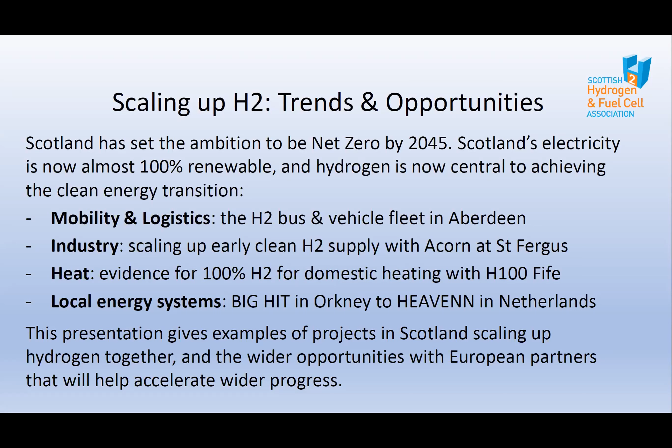And we're also linking into other projects around Europe. Many of these are taking some of the ideas from Scotland and actually scaling up. And as a key part of that, CeeD is obviously bringing together people from across Scotland with many different areas of interest. The Scottish Hydrogen Fuel Cell Association, we're targeting the activities with hydrogen fuel cells, basically what it says on the tin. So many of the speakers today are actually from the association, and if you want to find out more, please do get in touch with me at any time.

So where do we start from? Well, the key thing here is net zero, and a lot of the work that is happening now is about delivering the net zero targets. Scotland's got a target for net zero by 2045, but I would suggest the really important one now is the 2030 target, which is a 75% reduction in greenhouse gas emissions by 2030.

To put that in context, the European Union recently set their target, a 55% target by 2030. But as you'll see later on, the targets could actually be complementary.

Within Scotland, we've seen a great increase in the amount of renewable energy being produced, to the point now where Scotland's annual electricity demand is pretty much met from renewables. It was, I think, 97% of Scotland's electricity last year was met from renewable production in Scotland. But we don't stop there. We go beyond 100%, and then the opportunity is about how we start to produce green hydrogen from renewable electricity, using the electrolysis of water with electricity to produce hydrogen and oxygen. The hydrogen is what we want.

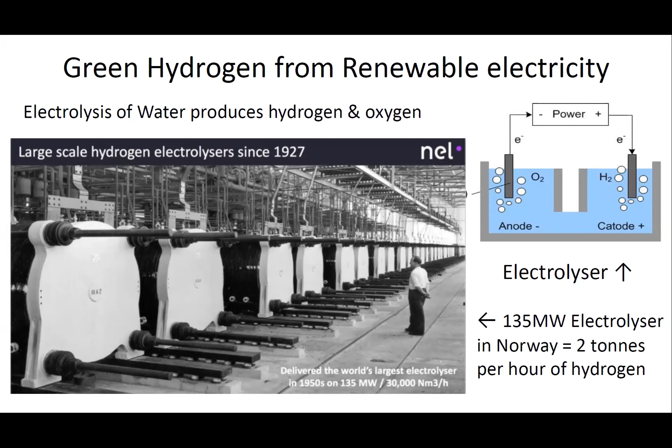Nigel, you've muted yourself. I don't know how that happened. Must have been getting too excited. Anyway, let's hope it doesn't mute itself again.

So the journey around Scotland, we're going to take in Aberdeen, Fife, Orkney, and then touch briefly on Cromarty before we look at the wider context.

Starting in Fife, 10 years ago the Hydrogen Office in Fife was opened. Since then, it's done fantastic work building up the appreciation of hydrogen as part of the energy system. The education and outreach has reached some 35,000 pupils and students in Methil and across Fife.

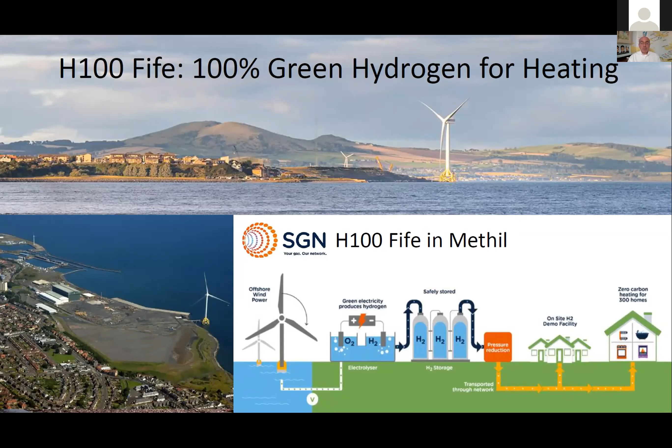The reason that's important is because the next steps in Methil are very much about how we start to deploy hydrogen in households, hydrogen for heat. Colin will probably touch on this later. It's the SGN H100 Fife project, using green hydrogen produced from offshore wind, distributing it around Methil and giving householders the option to use hydrogen instead of natural gas for domestic heating. Colin will probably pick up on this one later.

The key thing here is, why use hydrogen? Why not just use electrification? This comes back to the fact that when it's cold, we all tend to put the heating on, and that means there's a lot of demand for heat - the demand in winter for energy for heating is about 6 times more than in summer. At certain times of day it can be even more than that. On cold mornings, when everybody puts their heating on at once, there's an awesome amount of energy needed. So it's about supplying that heat securely, low carbon, all of the time.

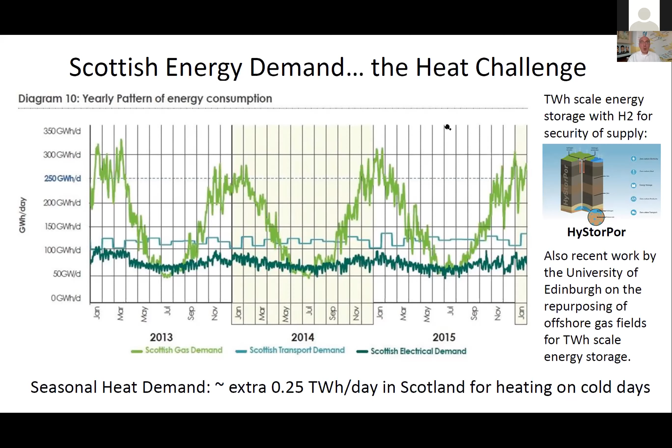Moving up to Aberdeen, the focus there has been more on transport. The deployment of hydrogen fuel cell buses in Aberdeen has allowed them to build up not just the buses, but a whole fleet of about 65 hydrogen vehicles, including buses, trucks, vans, and cars.

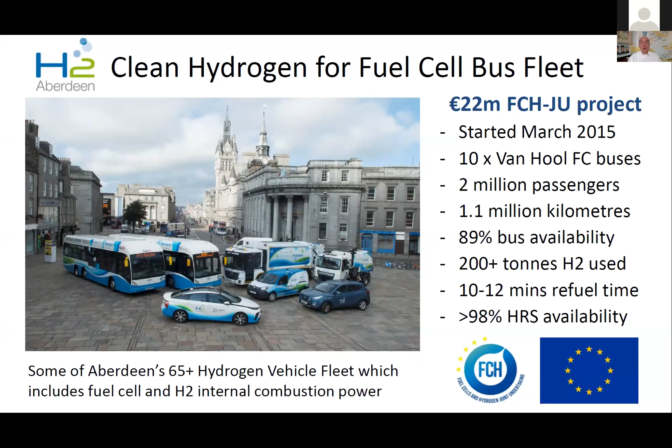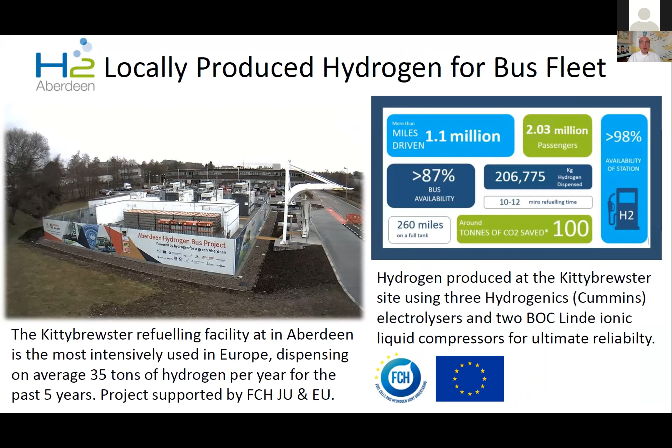This has given Aberdeen a lot of experience in not just the vehicles, but also the refueling. This refueler here we think is actually the most intensely used refueling station in Europe, dispensing about 35 tons of hydrogen per year since 2015. The buses have done 1 million miles, carried a couple of million passengers, and been exceptionally reliable. This is important - if you've only got 1 or 2 refuelers, you need to make sure they're running all of the time.

As well as the buses, there's the Mirai, the Toyota Mirai fuel cell car. Importantly, this has been put into a city car club application where anybody in Aberdeen with a driving license can use this Mirai. You just need to book it up and then take it out and experience the fuel cell comfort and low emissions.

Going forward, although fuel cells will play a massive part in delivering net zero, we also think the use of hydrogen combustion engines could be a very important approach, especially for heavy duty applications such as marine. This CMB Hydrocat is an example of one of the boats coming through at the moment - ideal for work boats, 1,000 horsepower engines running on hydrogen, using a couple of 100 kilos of hydrogen a day, but displacing a lot of fossil fuel.

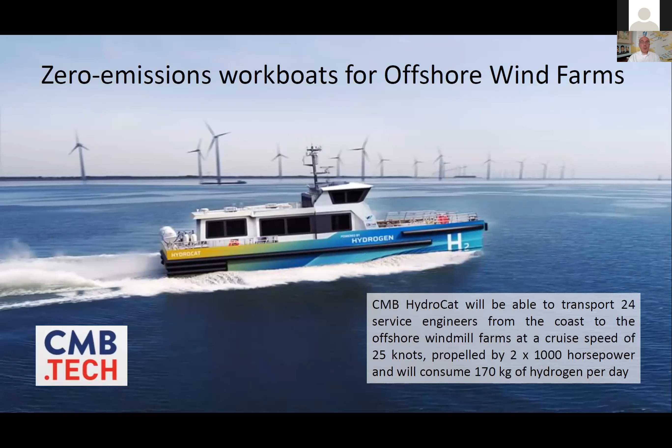Going forward, Aberdeen is very much the hub for not just offshore wind and green hydrogen, but also for the production of hydrogen from natural gas using carbon capture and storage.

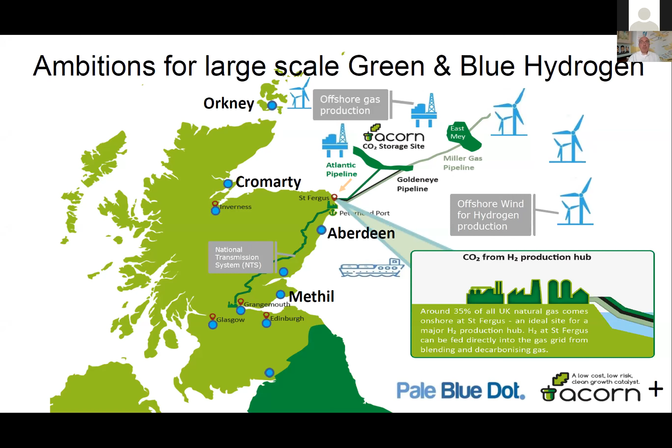The opportunity is to move green hydrogen, blue hydrogen, or low carbon energy from Scotland into Central Europe, where they need it to meet their targets. But moving now up to Orkney - this is a location that is several years ahead of the curve in terms of deployment of renewable electricity.

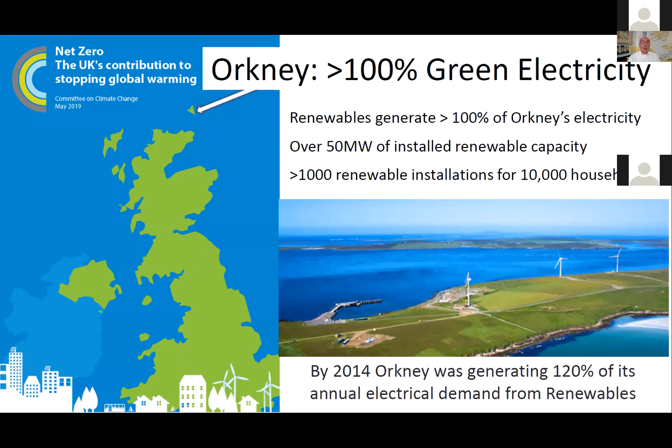They've been self-sufficient in renewable electricity for about 5 years, but that brings its own challenges. One of them is that sometimes the wind turbines produce more electricity than is needed locally. The opportunity here has been to take the hydrogen from where it's being produced on some of the islands.

So Eday and Shapinsay, and move it down to the mainland of Orkney. This is being moved by ferry.

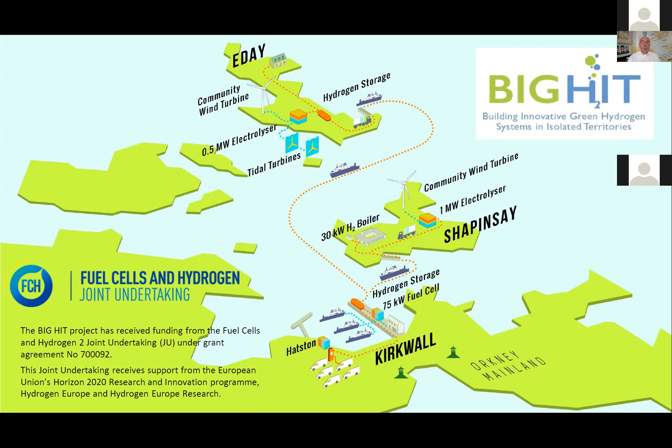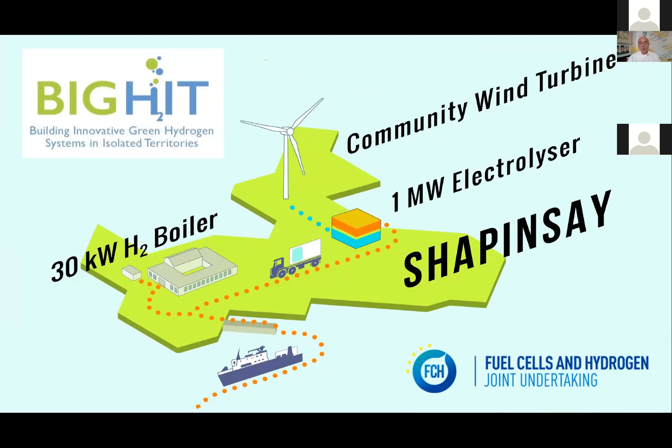Electricity from the wind turbine is used to produce the hydrogen. That can then be used on the island or moved down to Kirkwall, where it's being used for various applications - transport, heat and power. Moving forward, they've got some very interesting approaches in terms of other transport applications.

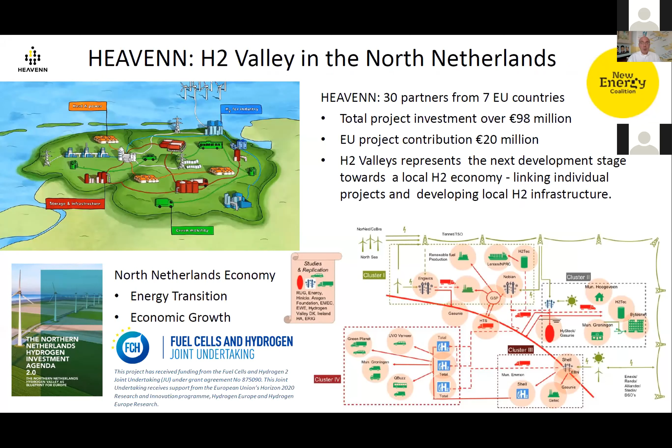But the lessons from Orkney have been applied to other countries. The North Netherlands HEAVENN project is a much larger project, but uses the same principles of building up hydrogen supply and hydrogen demand with the infrastructure.

Also on the island of Mallorca, the Green Hysland project is producing electricity from solar rather than wind, as you might expect, and is looking at using a pipeline to move the green hydrogen from where it's produced down to the city of Palma, where it will be used for heat and transport applications.

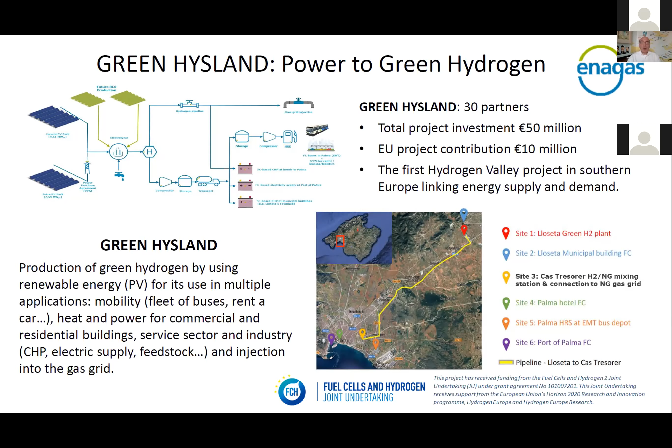So it's very much about building up the supply and demand. Further information about the approach is available through the Hydrogen Territories platform. If you're interested, just log onto the website and you can get more information from the HTP.

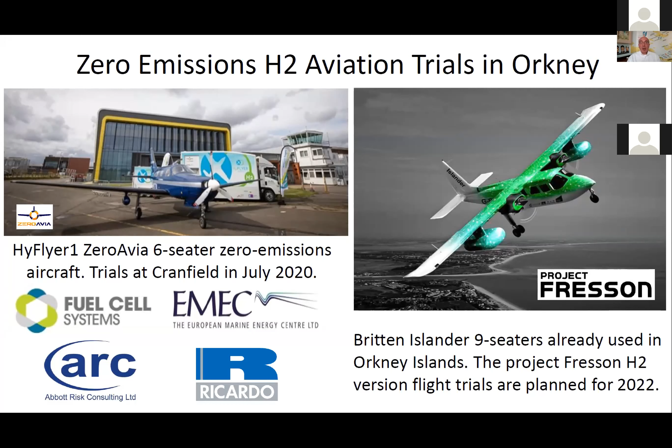So what next? Well, it's very much about some of the innovative projects. I mentioned Orkney's interest in other forms of transport. They've been involved in the HyFlyer project, the single engine hydrogen fuel cell plane that you see on the left, and the Project Fresson, which is actually converting a Britten-Norman Islander into a hydrogen plane. Those planes are actually used in Orkney.

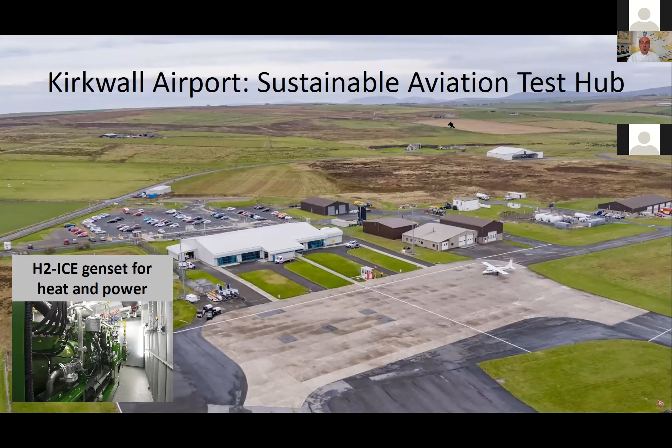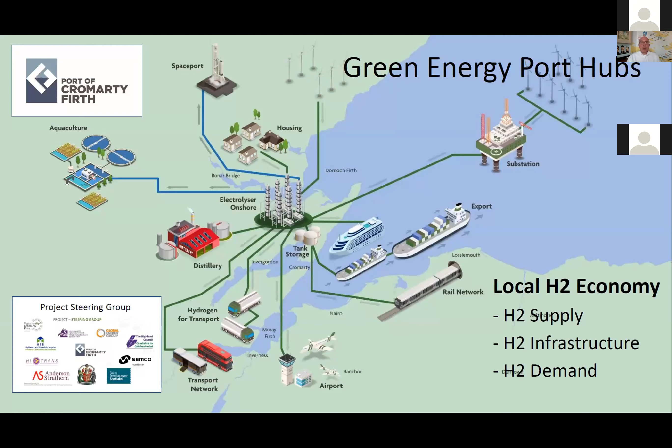And scaling up, this is where Cromarty gets very interesting as an opportunity. You'll be hearing more about this later. Just to say that the whole idea of the hub is building up supply, the infrastructure, and the demand - take any one of those away, and it gets very difficult to make it work properly.

And the opportunity for Scotland goes beyond Orkney, it goes beyond Cromarty. The North Sea has got a fantastic resource for offshore wind - it's estimated that in the Scottish part of the North Sea, there's something like 735 gigawatts of offshore wind potential. We've just started - it's a long journey, but it's going to be a massive transformation, essentially displacing the production of oil and gas from the North Sea with production of renewable energy.

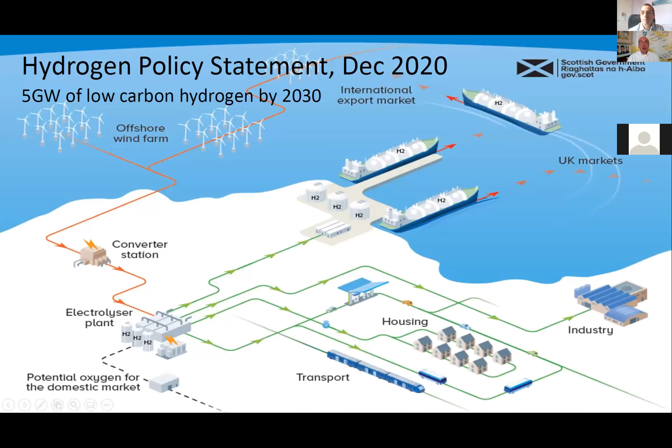And this has been recognised by the Scottish Government. The hydrogen policy statement came out in December last year with a target of 5 gigawatts of low carbon hydrogen by 2030, scaling up further for 2045. But it's not just about local demand, it also sees the potential for international export markets and also providing other areas around the UK with low carbon hydrogen.

And this comes back to essentially the opportunity. Scotland is in a fantastic place with renewables. It can build on the projects that have happened already, scale up the production of green hydrogen and blue hydrogen, and then start to supply low carbon hydrogen, low carbon energy into markets such as Central Europe, which have an ongoing need for that supply and don't have the same access to renewables.

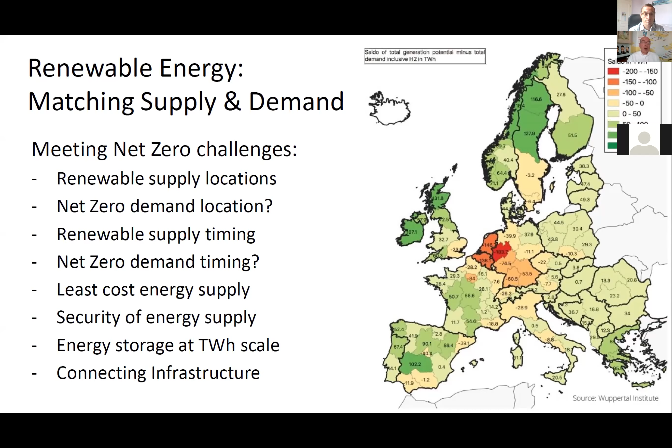Going forward, a great opportunity coming up later this year in Glasgow is COP26 in November. Hope you can make it along to that. I'm sure it will be busy. It's now been confirmed that it will be an actual in-person event. And that very much is the opportunity for Scotland: scaling up hydrogen, scaling up the use of renewables, and using it to decarbonise Scotland, and helping to decarbonise other countries and the whole of Europe.

Dave, that's very much my presentation, and I'm going to stop sharing now and hand back to yourself for the rest of the event. Thank you very much, Nigel.

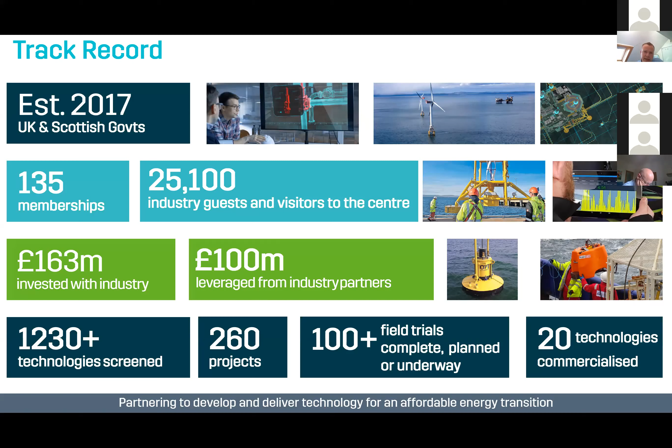In terms of our strategy, we've got 3 focus areas. We want to decarbonise the existing oil and gas industry, but we also want to look at the growth industries of hydrogen, carbon capture and storage, and offshore renewables. And then we've got a third programme looking at offshore energy 4.0 — that's digital technology, anything that can automate processes, software, all the smart stuff.

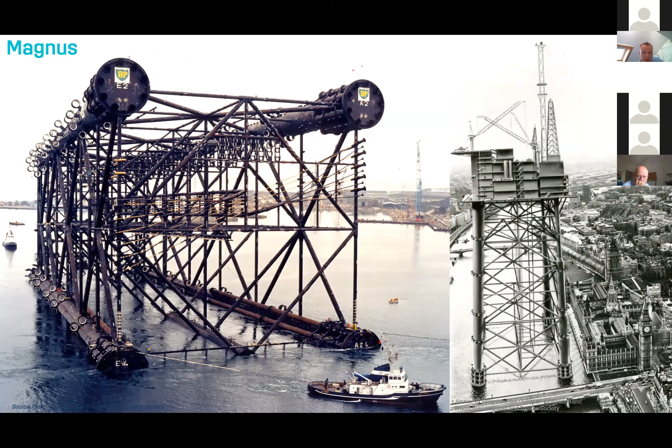Given the audience, I thought I'd start with this slide here: Magnus in the early 80s being towed out, still the largest steel jacket to be deployed in the UK North Sea — this one slightly larger than the Norwegian sector one, but a tremendous feat of engineering achievement. To me, it's a real reminder of what we can achieve as a country, both in terms of design and manufacturing capability. The image on the right always blows my mind whenever I see it, of Magnus alongside Big Ben. I've been on Magnus a few times, and you don't really get the scale of what's under the water from sitting up there on the top sides, but it's a truly colossal structure.

We look at the workforce that we had in the Cromarty Firth back in the boom days of the 70s and 80s. It probably averaged around 2,000 people at Nigg alone. You had a large workforce at Ardersier, you had the Kishorn workforce, and you had the BIFAB, or Firth of Forth, workforce.

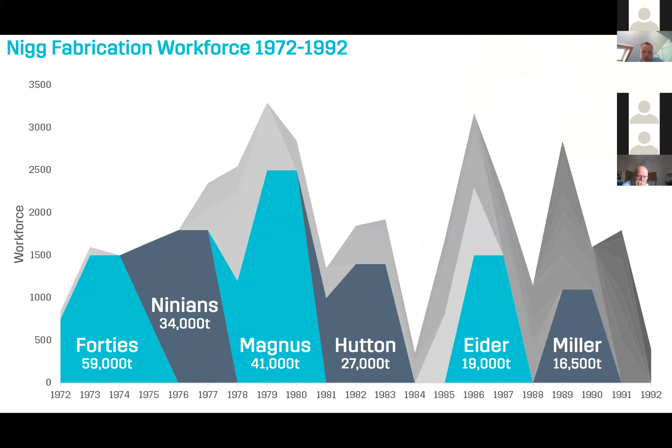And to me, that is the real prize in the energy transition. If you look at the scale of capital expenditure that we need to deploy as a country, indeed as a continent or across the globe, it's colossal. So the manufacturing opportunity is tremendous in loads of sectors.

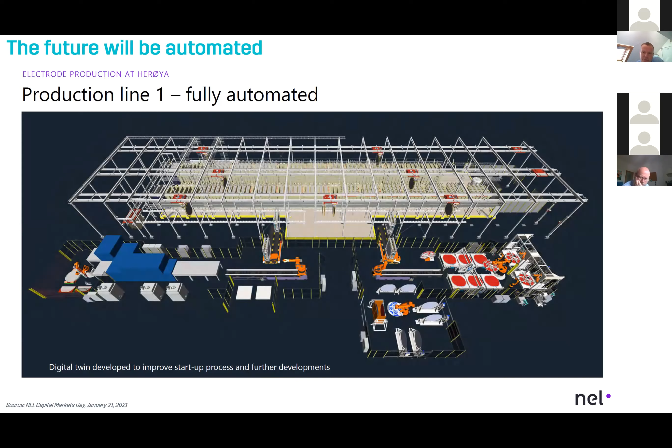If you look at the assembly line here, you've got bottom right the factory test and completion section, and you've got components coming in on the left, flowing through the system, with everything being tested and deployed at the right-hand side.

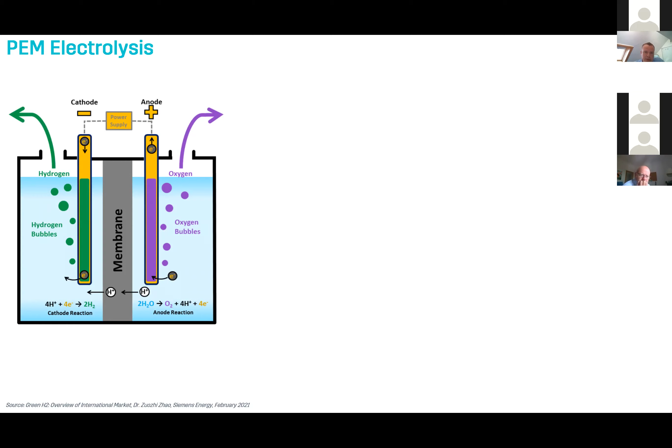So in the mid-60s, GE was the first company to introduce PEM electrolyzers. They are much more dynamic and can work with intermittent renewables. They're more expensive at the moment because there are precious metals involved in manufacturing them, but that is ultimately the future for green hydrogen production in Scotland.

Now, if you look at what that looks like in real life, this is a still from Siemens - a partner of OGTC, a company we've developed quite close links with. This is their Silyzer electrolyzer technology. It's modular and can be deployed up to 17.5 megawatts at the moment, currently being scaled up to 30 megawatt units. In terms of scale, it's roughly the size of three 40-foot shipping containers - large, but not mind-blowingly large.

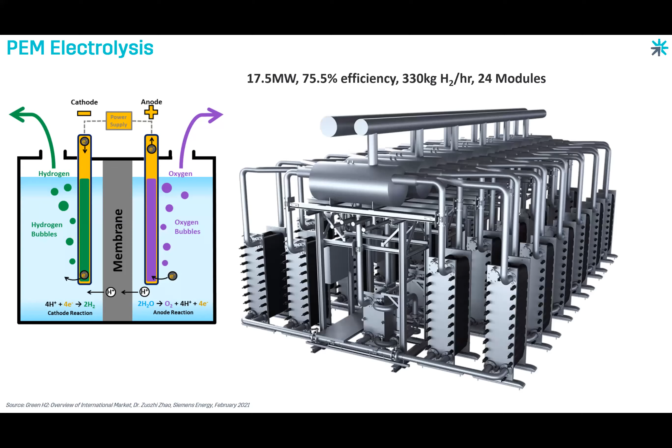It can produce 330 kilograms of hydrogen an hour. It's got a fast ramp-up rate, so you can basically ramp up from 0 to full production in less than a minute. It consumes 10 liters of water for each kilogram of hydrogen produced, so you do need quite a significant water supply.

If you look at existing compressor technology, you can probably use existing compressors with a blend of up to roughly 10% hydrogen without any modification. Between 10 and 40%, if you change some of the impellers and adjust some of the gearing, you can still use existing technology. But beyond about 40-50% hydrogen blend, you need to replace the compressor, and there are some quite significant modifications that need to be made.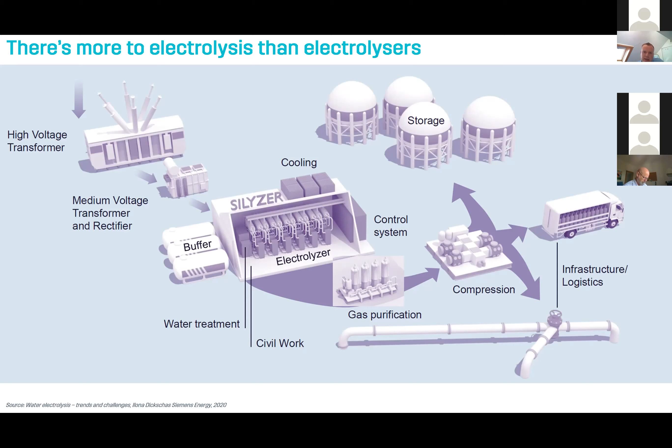Hydrogen's got a lower molecular weight, so you need to increase the speed of the compressor to get the same transport of energy. So a lot of challenges that we're starting to look at in OGTC along with our partners there. Storage and transportation - can we reuse the existing gas network? What modifications do we need to make? For storage, are we going to use ammonia? Are we going to use LOHC? Is it going to be compressed? There's a lot of technology challenges, but also engineering opportunities in there.

And this is just another slide that I think helps illustrate the potential supply chain opportunity. It's from an NEL presentation, and they show in purple the scopes they see as internal to their business model, and everything on the right side is going to be outsourced to EPC partners. So you've got HVAC, electrical work, civils works - a whole host of things that the oil and gas supply chain, that the civil supply chain, can get involved in.

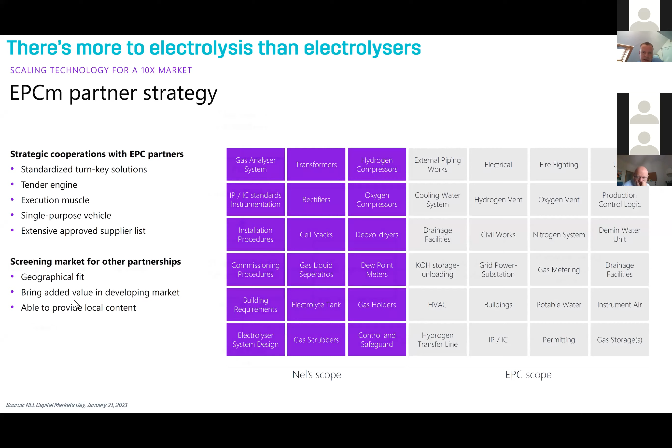And we as an industry need to start doing the business development work to get some of these opportunities and to build the partnerships with companies to be able to deliver the scale of project that we need to develop. Now, the same happens in blue hydrogen.

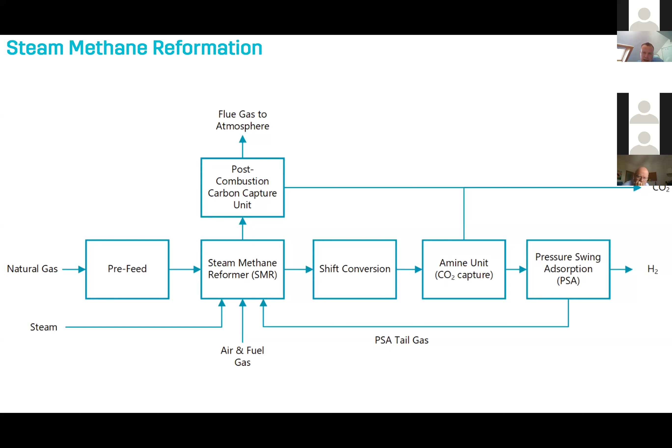So we quite often look at that as a chemistry lesson as well. You can see here the block diagram for basic steam methane reformation. You've got natural gas coming in on the left, then a pre-feed stage where it's purified to remove any sulfurous compounds, crucial to prevent poisoning the catalyst in the SMR unit itself. SMR is a high temperature process where you use steam to split the hydrogen from the methane gas. You end up with a syngas, which then has to go through the shift conversion and carbon capture process to get it to a purity where it can be used.

And what does that look like in real life? This is a great image from an Air Products presentation. You see the natural gas coming in bottom left, going through the sulfur removal process, through the steam methane reformer, which is a huge structure itself. You can see the scale compared to the people down there at ground level, with a lot of piping and process equipment involved. You see the water gas shift reactor coming out the back end, then this PSA carbon capture technology, ultimately ending into the gas network.

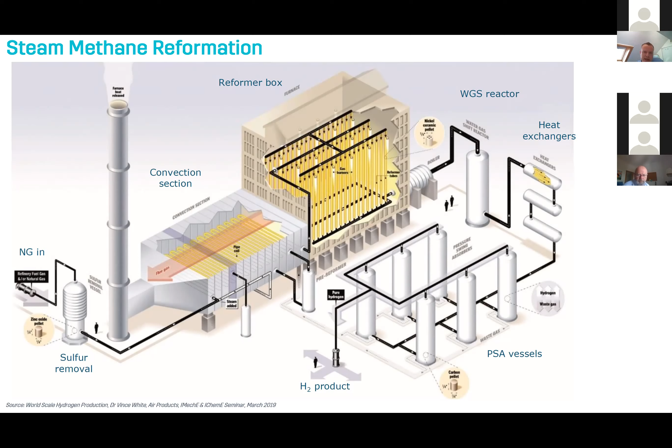And looking at that in real life, this is a unit that Air Liquide commissioned earlier this year: 82 million euros of construction cost, over 400,000 person hours, so a significant project, producing over 50,000 cubes of hydrogen each hour. That is the sort of project that the oil and gas supply chain has delivered in different guises all over the world, and there's a huge opportunity for us to look at this in the UK.

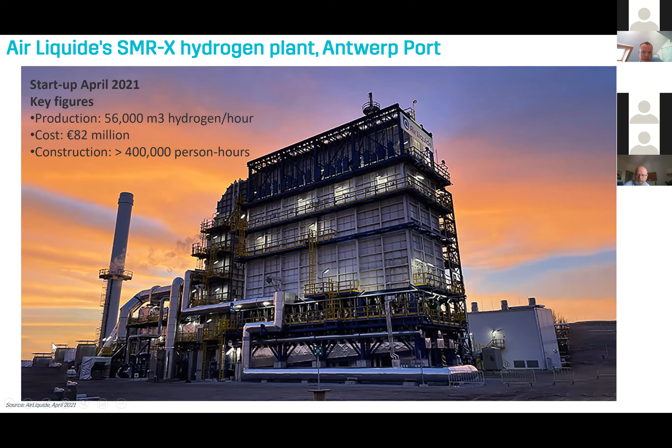I think Sam will be touching on this in the Pale Blue Dot presentation later on. I want to finish briefly, and I want to try and stick to my time with a short personal story.

I mentioned Magnus at the start. Back in 2005, I was engineering manager on the Magnus Extension project, the biggest brownfield project in the North Sea at the time. We were installing 4 new conductor slots on the outside of the jacket, lots of topsides modifications, lots of subsea work. We had a team of engineers across the usual disciplines: mechanical, piping, structural, electrical, process, tech, safety, instrumentation.

Later in 2005, I moved for 2 years to the Outer Hebrides. I took a post with the local authority, and one of the projects we delivered there was a hydrogen station, a fairly standard piece of kit: electrolyzer through storage, through compression, through pre-cooling into the dispenser. But the thing I learned from this project was that the skill set involved in oil and gas was very similar to what was needed to deliver this, albeit a small scale project. That's equally applicable when you look at the gigawatt scale projects we need to get to, just on a much larger scale.

So I will stop there. I think I hand over next to Ed and Joanne, and I look forward to taking your questions at the back end of this session.

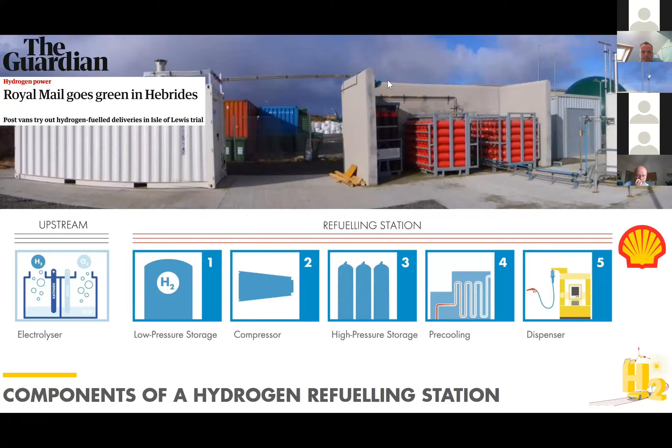Morning all. So as Nick said, this is very much an introduction, a fast run through of hydrogen safety. Really this is just to give you the first jump off points to go and get additional information. I've embedded quite a few hyperlinks in the presentation, which will be provided after the webinar, so please don't feel you have to make notes, it will be available. I hope that will give you a good lead into where we need to go. I'm going to quickly run through the hydrogen technologies and applications, because that will give us an idea of what safety considerations come off the back of that.

So, a high-level summary of some of the principal legislation, very much focused on the UK, but just to give you a few touch points, and also some high-level considerations that affect safety, and then some additional resources. As Martin said, although everyone seems to focus on the individual bits of technology, we do need to take a whole systems approach.

So that's not just the technology, but also how we manage, how you resource, and how you have, for example, appropriately qualified and trained maintainers for your system through life. So just to summarize.

Broadly what hydrogen technologies are considered, and Martin covered quite a few of them in his presentation. I'll go through basically production, storage and transport, and actual application. Now, it's really important to emphasize here that hydrogen is not a new material. It's been used in the world for a long time, but very much at the small scale, high quality hydrogen for scientific applications through to very large scale process industry. What we're finding is that the real area of change is in where it is applied in the different sectors, and that's where some of the challenges arise.

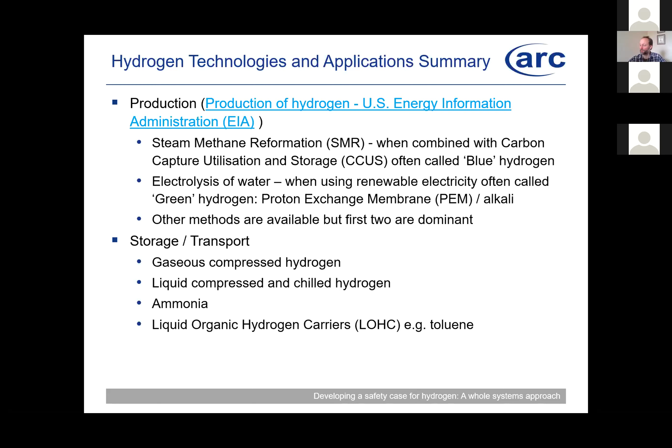In terms of application, there's a number of applications, but what we're finding is you need to look beyond just the hydrogen part - the fuel cell, the hydrogen storage. There are combined systems in each of these areas, but these are the broad areas of new application. So stationary power storage - predominantly we're seeing compressed hydrogen with a fuel cell, where the hydrogen is run back over the fuel cell to provide electricity.

Road transport has two broad categories of system here. We have direct injection of hydrogen into an internal combustion engine, replacing some or all of the fossil hydrocarbon fuel. Or the other approach is akin to an electric system - hydrogen storage, a fuel cell, often some sort of battery or capacitor, and then ultimately an electric motor. This configuration of hydrogen, fuel cell, high peak power demand energy storage system, battery capacitor, and electric motor is quite a common emerging configuration we're seeing across a number of sectors.

Rail transport is still very much in the research and development phase, although there has been a deployment in Germany of a hydrogen rail. The sector is still very much learning. But again, it's normally more the electric drivetrain configuration - hydrogen, fuel cell, battery capacitor, and electric motor.

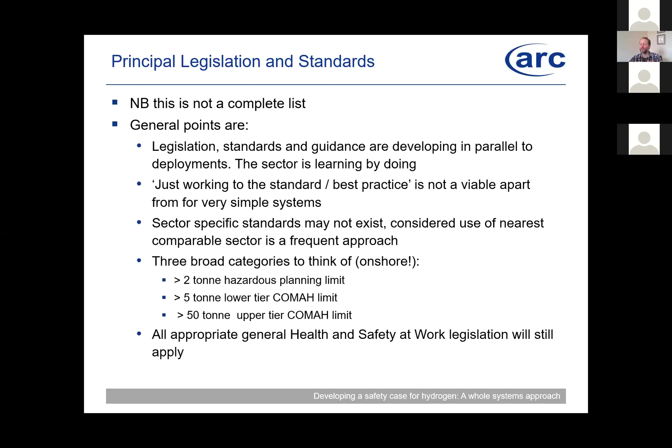Again, just to reiterate, all appropriate general health and safety at work legislation will still apply. But broadly speaking, you're going into increasing levels of oversight, review, and depth of assessment you need to do.

So in the UK, please note this is not a complete list and would need to be reviewed for specific applications, making sure you're working to the most current updates and versions - this is just a representative sample. So broadly we're talking about pressurized gas and pressure system regulations, but also transportable systems. We're talking about flammable and explosive materials, so DSEAR and equipment and protective systems for use in explosive atmospheres are all going to be relevant.

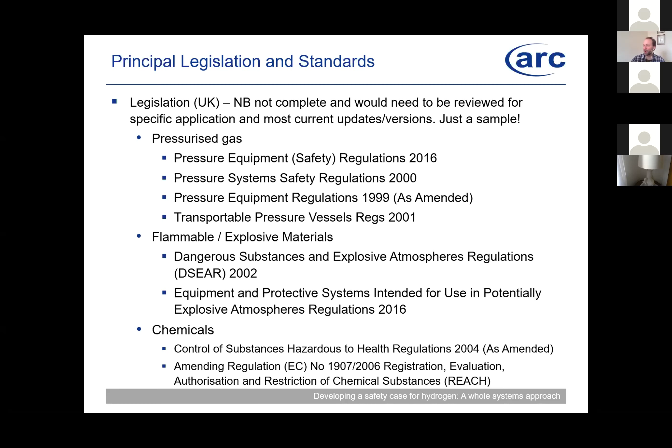Depending on the specific application, we may well be into COSHH - for example, the use of alkali electrolyzers, or metal hydrides, you may well have to consider it. So you do need to be aware of this, but also REACH might well be applicable. And of course, if we're planning to move hydrogen around, there's a whole load of legislation around the transport and regulation of goods, both on the road and also in harbours and marine applications.

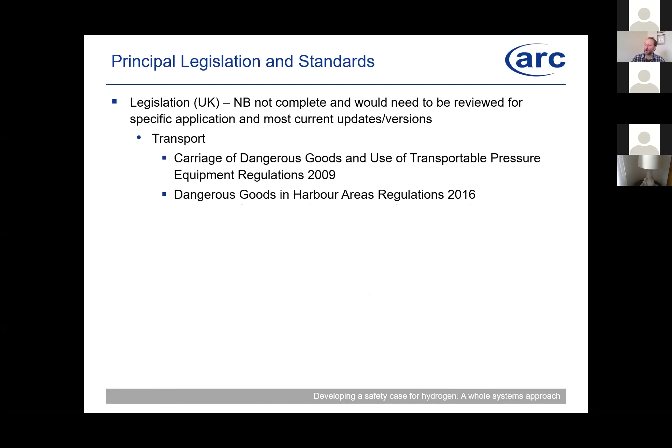Some specific challenges around the characteristics of hydrogen in comparison with other flammable gases, which members might be aware of: it's low density. Most practical systems are operating in the 350 to 750 bar range - this is a much higher pressure than most other flammable gas systems, and you need to be aware of the high pressure risks as well. Hydrogen has very low viscosity - it is going to leak.

If there is a crack or a slight breach across any sort of gasket, you will almost definitely have a leak of some sort. Hydrogen has high diffusivity, and can migrate through a volume very quickly and through materials.

Related to that, we have this issue of embrittlement. It can affect materials that it's contained or transferred in.

It has very high buoyancy. We of course all know the Hindenburg, but this can work to your benefit in that any release is going to diffuse very quickly. But don't assume that it will, because with a high pressure release, that can have a huge amount of momentum, and actually a jet can stay quite low to the ground or level with the point of release, but it will eventually diffuse away.

It has a very wide flammability range, far more than other flammable gases, and a very low ignition energy. It's probably going to ignite, and really the question is just whether it is a delayed ignition or an immediate ignition on the leak.

Related to that, it has an invisible flame. It's not really visible in daylight. It burns high in the UV range, but there is an advantage to that in that it doesn't radiate that much heat. And also because of this rapid burning rate, you tend not to get the same sort of thermal load you'd get from a hydrocarbon fire or explosion.

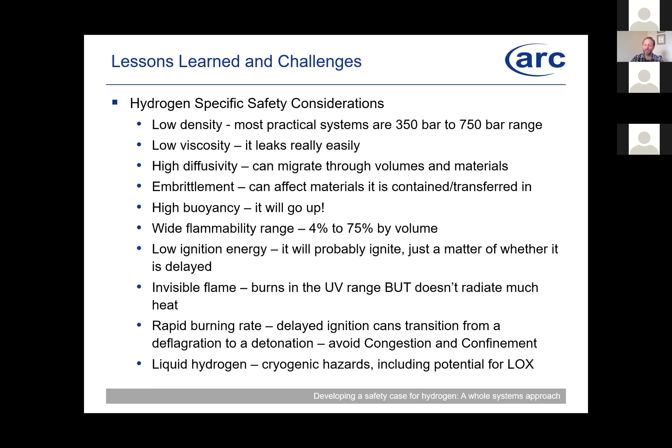So broad lessons learned: there's plenty of standards for individual items of kit or components, but as Martin alluded to in his presentation, you do need to have this consideration of a whole system approach and the integration of the components and kit and how they will be operated and maintained. How you manage your system is going to be really, really important.

There are some fairly significant supply chain challenges that do impact safety. Installers and maintainers are sparse and often based in geographical locations remote from where the systems are deployed. We have an awful lot of these small deployments that are spread out and often remotely monitored.

As much as Martin was quite right in saying that we can transfer our skills from other sectors - there's an awful lot of relevant experience - you do need to be considered about how you do that transfer, and make sure people are aware of the difference between the different systems.

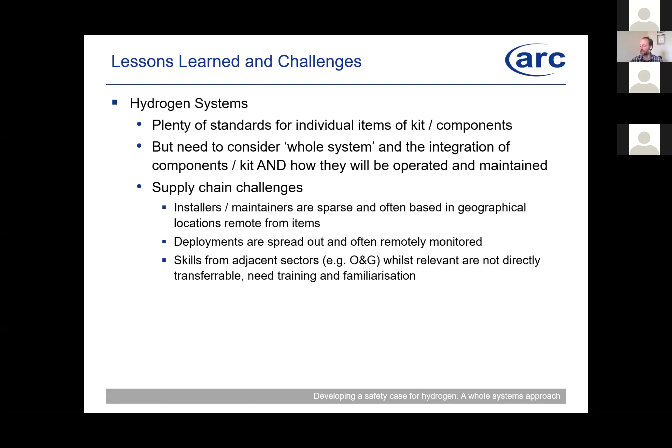Now all of this is really coming down to this. This is an accident that happened in Korea, South Korea, around this time in 2019. Very significant accident. The immediate cause was - it's a research and development park - they were testing electrolyzers, PEM electrolyzers.

They ended up with cross-contamination of oxygen into the hydrogen stream with a mix of oxygen and hydrogen in storage, internal static ignition, and this congestion and confinement which I mentioned before resulted in effectively what was a bomb. So you can see the storage tank above.

It detonated, killed 2 people, caused 5 very serious injuries, and very significant property damage.

The immediate proximate causes were that a number of items weren't installed properly on the system, but again we need to take this wider systems approach. There was safety management failures at multiple levels and multiple organizations, and there was ongoing pressure to complete the testing.

Perhaps there was this view that because it was a research and development or demonstrator project, it didn't need the same level of safety assurance. You need to be really cautious of this kind of safety culture and assumptions around what we're deploying. So here's a summary of a number of relevant standards - please don't think you need to note this down.

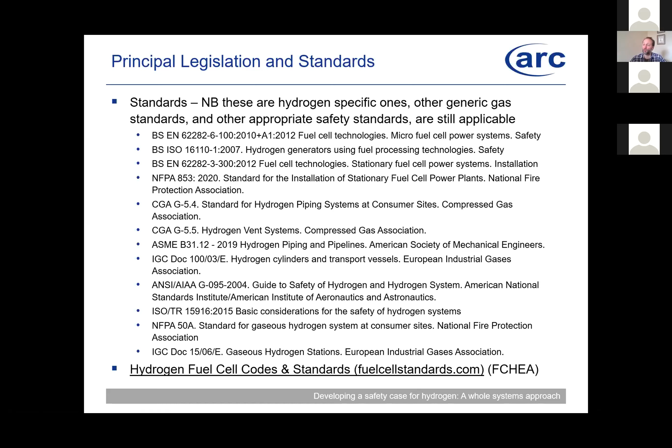So a really useful resource, please go and use that and look at your specific sector. The HSE is doing a huge amount of work, along with the Health and Safety Laboratory, who've been doing a lot with SGN. These are all hyperlinks to research reports which the HSE publish. Please use the HSE, there's a huge amount and depth of information there. Hopefully this gives you a shortcut to the most relevant ones for hydrogen, but please go and have a look, there's some more general pages too.

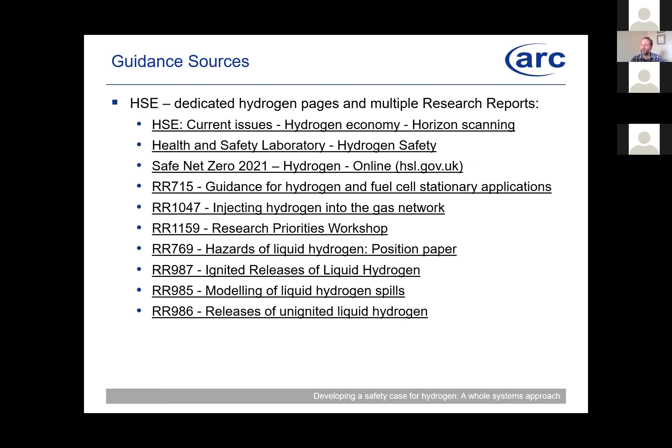This Safe Net Zero seminar, run earlier this year, was fantastic. All the presentations are still available. Please go and familiarize yourself with it, it's really useful. There's a whole host of additional resources here too: British Compressed Gases Association, Gas Association, EIGA, Hydrogen Europe, a huge number of projects and depth of resource there as well. HyResponse is specifically targeted at first responders to hydrogen incidents and accidents, but it's also got some very good primers on hydrogen technology and its behavior.

The FCHEA, who I mentioned previously, has a really good website outside just the codes and standards they monitor, a huge amount of resource focused on the US but really useful. International Association of Hydrogen Safety, there's two links, one to the conference and one to the generic page. Fuel Cell Hydrogen Europe, FCHJU, lots of useful material. SHFCA, Nigel, please go look at the SHFCA website, Nigel's a great contact. There's the HyLaw online database, a fantastic searchable database about different legal frameworks, codes and standards within Europe primarily, really good if you're working on projects across Europe. And finally, a link to a paper from one of the HySafe conferences, an introduction to hydrogen safety engineering, which gives a really good rundown of an overall hydrogen safety engineering process.

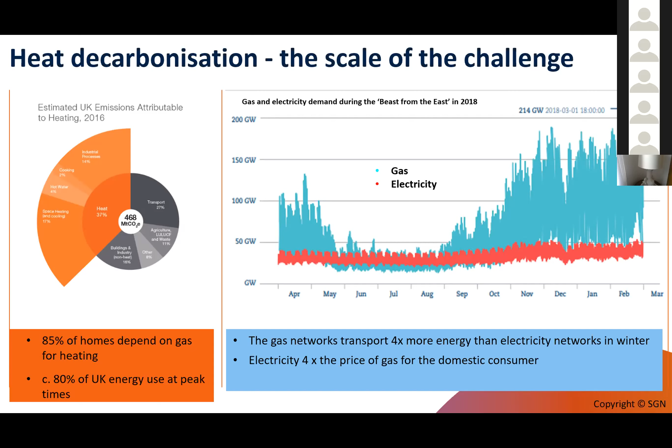So what are we doing? Proving the case for hydrogen is one of our key objectives. It's now a national programme looking at the technical viability and the safety of transporting hydrogen within the network. So our pathway for decarbonisation is a national joint undertaking now through the Energy Networks Association and their Gas Goes Green initiative, where we're developing a number of products that will show the role for gas and certainly hydrogen in the future. There's a national evidence base that we're working with BEIS on that involves both Scottish Government and the UK Government developing again that transition from natural gas to hydrogen.

And there's a number of key projects that either have happened or are in flight just now. So our Oban project looked at the changes to gas quality, and HyDeploy, that Cadent Gas are looking at, for the blending of up to 20% hydrogen with natural gas. Future billing is a key one for consumers - if you change gas quality, that could impact on the actual energy that consumers receive. And also, I mentioned H21, which is the project that Northern Gas Networks are working on, looking at network features with hydrogen. And one of the other critical ones that Nigel has mentioned is our H100 project, which I'll come on to in a couple of slides.

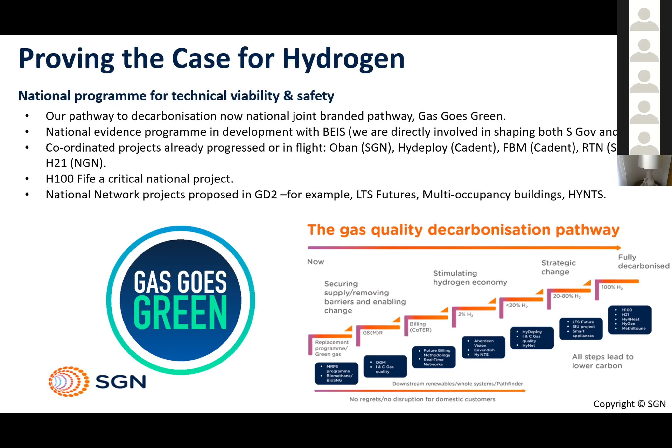I'll quickly skip through this. Again, a number of other presenters have touched on this - the kind of applications that are actually coming to the forefront with hydrogen. It's interesting that if we convert the gas network to transport 100% hydrogen, then it opens up a lot more opportunities to supply other vectors where we've not done that before with natural gas. So actually hydrogen is a game changer. And using the gas network just makes it a little bit easier to take hydrogen to a wider range of uses.

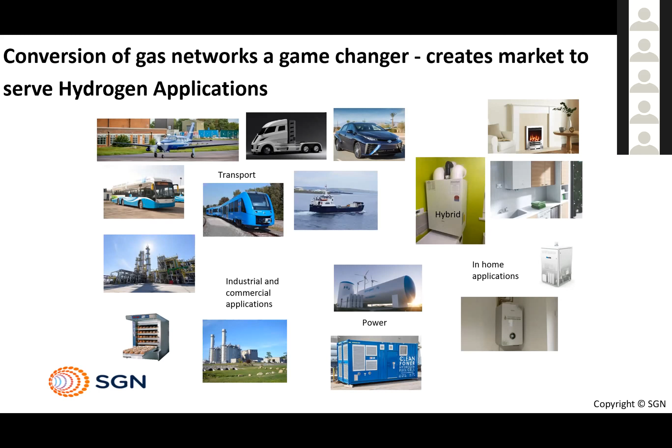So what have we done? We've actually carried out a lot of the early evidence gathering and development of risk assessments, both offline in laboratories, or as Ed mentioned, using some of the facilities such as the HSL have at their facility in Buxton. So we've tested looking at odorant within the gas network using hydrogen. We've looked at the consequence testing of materials with hydrogen.

Metering, and working with a number of other initiatives on the go at the moment. The Hy4Heat programme, funded from BEIS, looked predominantly at the downstream application of 100% hydrogen with appliances, and also, as I've mentioned before, the H21 project, which looked at network features. Aligned with this, there's some commercial and regulatory development we've undertaken as part of this early research work.

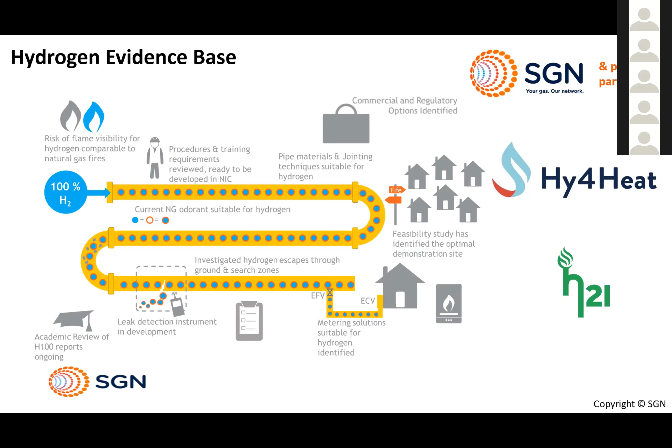We would never test this with real customers, which is where we are now, heading into our H100 project, which will be the first end-to-end demonstration of 100% hydrogen within a gas network.

Really, this project will inform the hydrogen system transformation. It has the opportunity to validate roughly 80% of the 280,000 kilometres of network material, components and construction across certainly the UK.

It's all about quantifying and qualifying customer and social acceptance of hydrogen for heat in a real world situation. We will certainly be working with the local authority through H100, and with consumers, and the project itself will hopefully be a statistical representation of those consumers and how they use hydrogen within their properties.

The project will run from an offshore wind turbine producing electricity to produce hydrogen from an on-site electrolyser. We will have on-site storage, which will help with security of supply during peak times. There will be other on-site injection facilities for the hydrogen into the network.

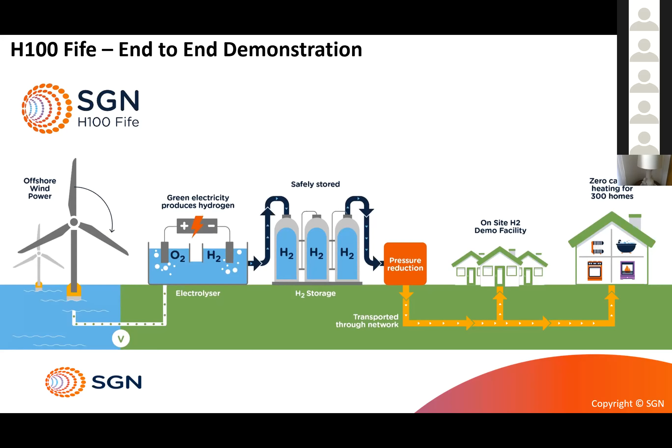Future phases and expansion opportunities for H100 - as I say, the initial project is for 300 properties. Future phases, we're looking to increase that to approximately 1,000 and look at conversion of the network. We were laying a brand new 100% hydrogen network for the first phase, but future phases will be looking at conversion.

We'll look at industrial and commercial opportunities as well, to bring on board some of the larger consumers, and also take into account other vectors such as transport in the region. We are really taking a whole system approach to this, and tying in with some of our other projects, which I'll mention in a couple of slides.

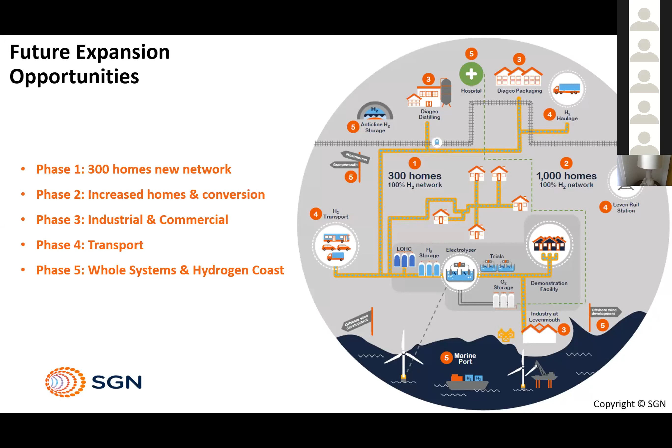I did talk about us looking at our high pressure pipelines, so we've already done quite a bit of work, again looking at the feasibility of converting the high pressure steel pipelines to hydrogen. From a distribution perspective, that looks like a viable option.

I'm not going to go through all these steps - you'll see them in the slides when circulated after the event. But our next step towards verifying the offline work is actually to test a section of pipeline we own and operate between Grangemouth and Edinburgh, which is currently filled with nitrogen, but we can use that to test the transportation of 100% hydrogen in that steel pipeline.

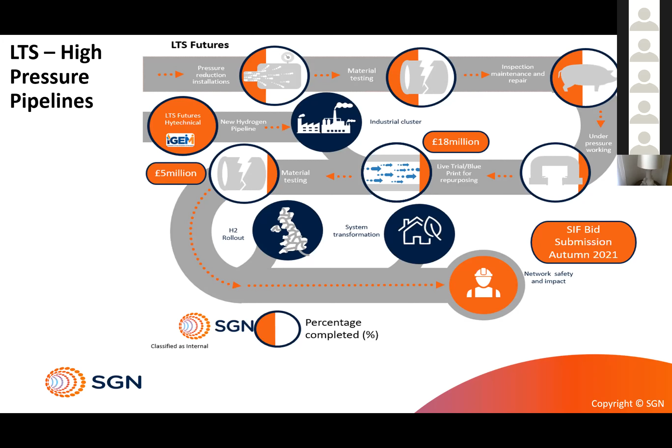Other work we're doing is our East Coast Hydrogen project, and this ties in again with some of the other projects that are ongoing, which you'll hear about later. So the Acorn project up in St Fergus - we are looking to start building a new hydrogen pipeline from St Fergus, initially phase 1, down to Aberdeen, and then look at conversion of Aberdeen city.

Phase 2 will be a new pipeline in the central belt, and phase 3 is tying in those two elements from phase 1 and 2 to join up and produce a hydrogen pipeline that will serve the majority of the major cities in Scotland, and again linking into the west coast as well.

This is really about helping the Scottish Government meet that 2030 target. It's ambitious, but we feel it is possible to have this constructed in time to help meet those targets.

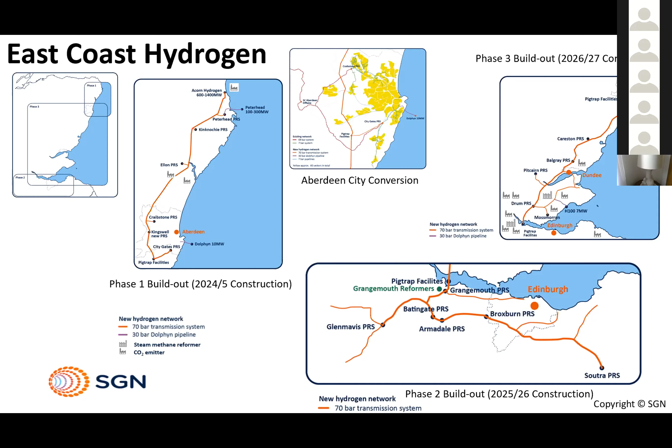A couple of other areas we're looking at, as mentioned before in other presentations - storage is a critical aspect of hydrogen. It's not a naturally forming gas, so during its production we will start looking at storage. We've got a number of projects on the go, one on a high scale, looking at storage of hydrogen through either ammonia or LOHCs.

We've also looked at the potential for geological storage of hydrogen through either salt caverns or porous rocks. We're working in conjunction with Edinburgh University and their geosciences department, looking at aspects of that storage, which we'll need as the market increases for hydrogen and that seasonal need for security of supply.

There's a lot going on in Scotland, but with our southern network, we're looking at an industrial cluster around the Southampton area, from the production of hydrogen with SMR or ATR, methane reformation, carbon capture and storage, using that hydrogen in that industrial cluster setting, with the view that it could be transported around our network to major cities such as Portsmouth and Southampton, and the wider use within other vectors such as transport.

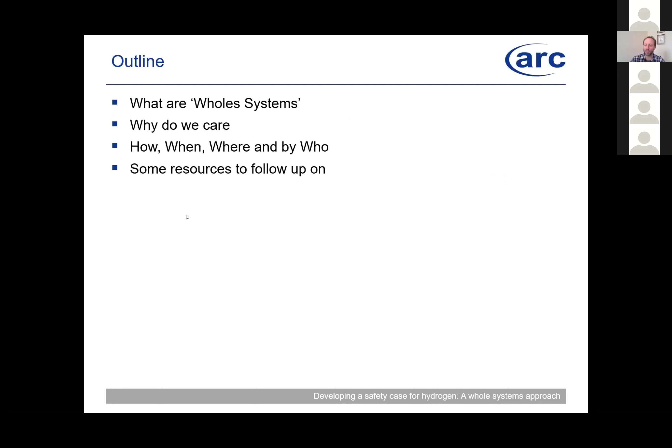So what are whole systems? Why do we care? How, when, where, and by who, and some resources to follow up on. So whole systems, first off, what do we mean by a system? It's the discrete elements and the interfaces between them - an active and dynamic relationship.

So what are whole systems? There's a whole lot of definitions, but one is: is it the vehicle, or the vehicle and the refueling systems, or the vehicle, the refueling systems, and the regulatory regime? You can define them in a number of different ways. So it's complicated, but actually there's a better phrase, which is complex. Now complex and complicated aren't the same thing. Complex is a particular type of system, with associated behaviors that can be really useful and we can leverage. But broadly speaking, it means we're looking at all of the system elements for all of the system life cycle.

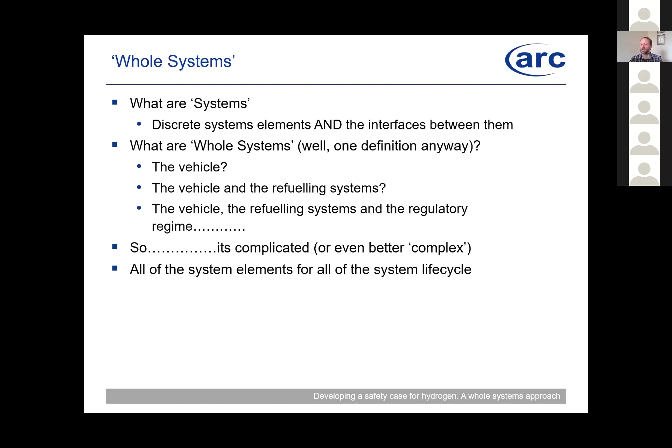So important concepts for whole systems are complexity. What does this mean? We have a mess - lots of different elements and interfaces, including with external things. There's internal structures to our systems. System of systems is a phrase that's often used, and we have system elements that are complex in their own right, so we're talking about automation, smart metering and our energy systems, this kind of thing.

The boundary of the system, or the system of interest, can be hard to define and can be a bit arbitrary. It's quite often porous, with loads of interfaces across that boundary.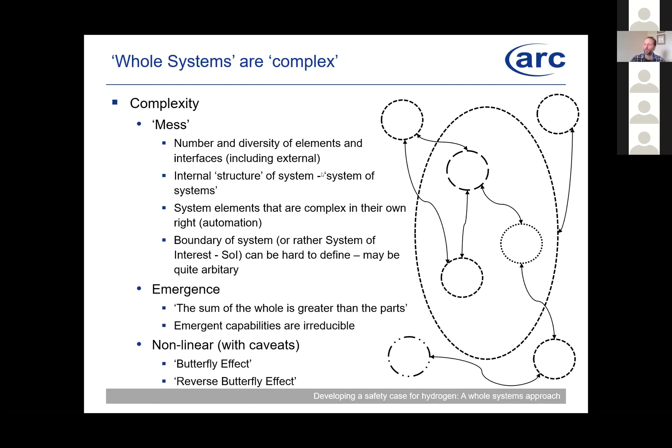Two really important concepts from whole systems being complex are emergence and nonlinear behavior. Emergence is the idea that the sum of the whole is greater than the parts, with capabilities coming from interaction between elements. For example, the gas network provides not just transport but also energy storage through line pack. Combined with electricity, you get emergent benefits you don't have with individual items alone. Nonlinear behavior means you don't necessarily get the same output from the input you put in. These two concepts are key for complex systems, which whole systems are.

So why do we care? A lot of the features or capabilities we want are actually emergent capabilities - safety, security, availability, integrity, usability, and other things. These are emergent characteristics we want, so we need to design for them rather than hope they happen. They emerge from the totality of different elements and their interactions. It's the difference between wanting a car versus wanting to travel between two locations at a time you decide - that opens up possibilities for different solutions and alternatives.

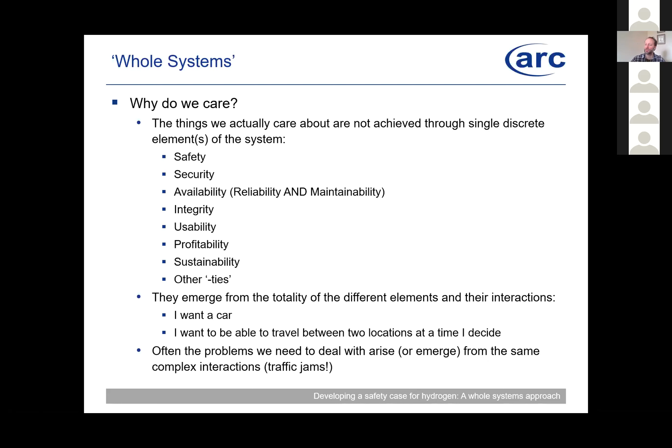The flip side, speaking as a safety engineer, is that the problems we get are often emergent too - a lot of safety issues and concerns arise this way. We get benefits, but also issues that arise, like traffic jams being a good example. This matters because for complex systems, if we haven't properly considered all the life cycle aspects, we miss requirements early on, which can present huge project risks and deployment risks. If you've missed early requirements by not thinking things through properly at the start, you're probably already off track.

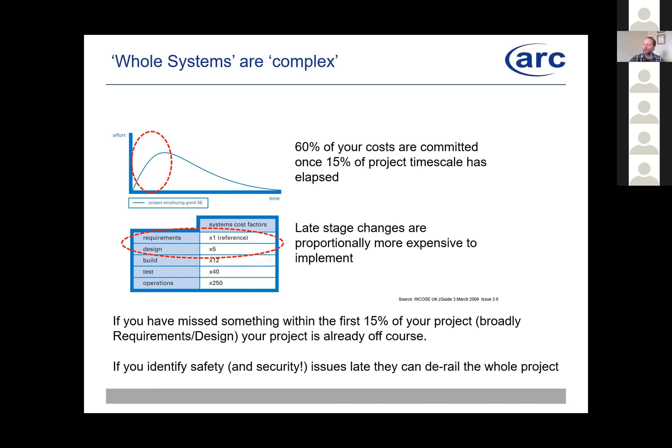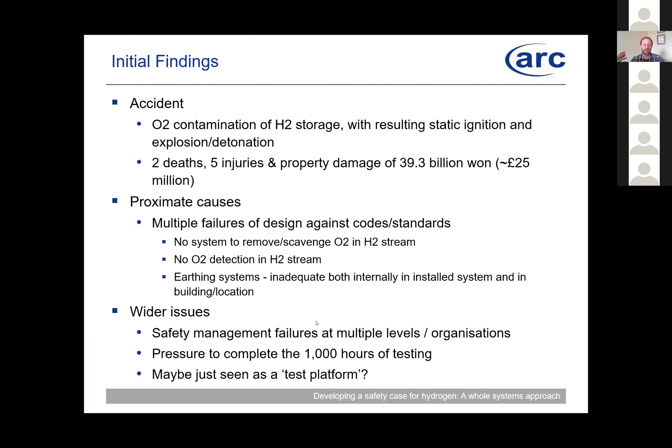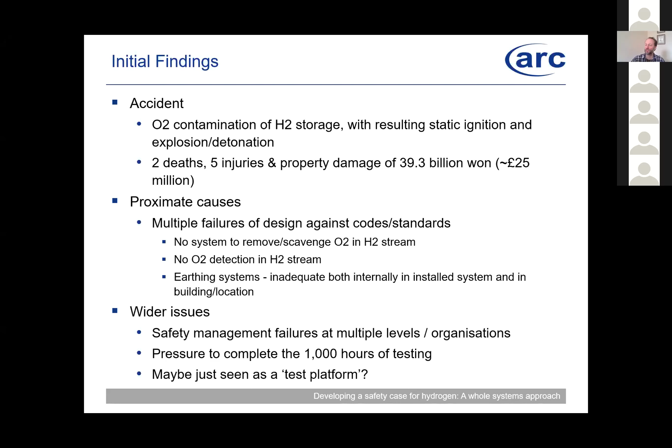But there are benefits to doing it as well. Going back to the example of Korea, I had the accident, but a lot of the concerns really relate to wider safety management, through-life maintenance, and commercial pressures around getting the work done. It's not just about immediate technological or proximate causes of accidents - it's the wider concerns. Taking this broader, more holistic view helps us avoid potential risks in the future.

To put this in context, there are some resources, all hyperlinked - SEBoK, the Systems Engineering Body of Knowledge, and INCOSE, the International Council on Systems Engineering, which has a UK branch with useful resources and links. There's actually the INCOSE Energy Systems Interest Group - the current chair is based in Scotland, working for the Offshore Renewable Energy Catapult. Get in touch with the ESIG - I sit on it as well, SGN are on there, and a whole lot of attendees, a really good body of people focusing on this broad area, plus a number of other links for you.

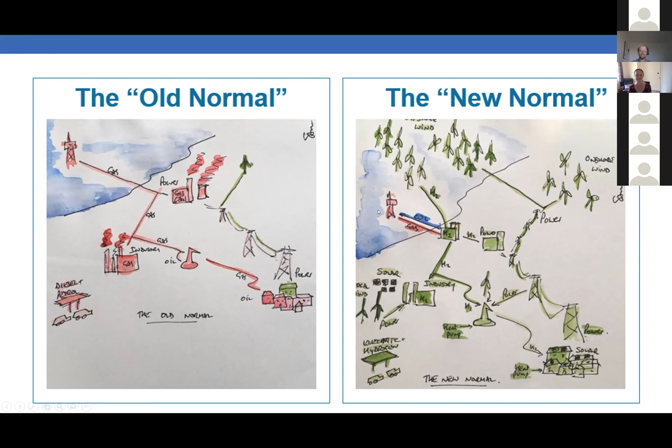That leads me to the first project I'll speak about today: the Acorn Hydrogen project. This is Pale Blue Dot's flagship project and part of the broader Acorn phases of work, which include the Acorn CCS project and the Acorn Hydrogen project, amongst other work. Pale Blue Dot are the lead developers on this project, joined by our industrial partners Harbour Energy and Shell.

It's a blue hydrogen project that will take natural gas from the UK continental shelf landed at St Fergus. St Fergus is currently the main landing point for natural gas in Scotland, landing about 35% of the UK's natural gas, so it's a fantastic resource for natural gas availability.

It's also fantastically well located for carbon capture and storage, and the North Sea accessible from St Fergus has a vast quantity of CO2 storage potential.

The project will be based at St Fergus and will take the natural gas and split it into CO2 and hydrogen. The CO2 can then be captured and stored in the sister Acorn CCS project, and the hydrogen has a couple of uses.

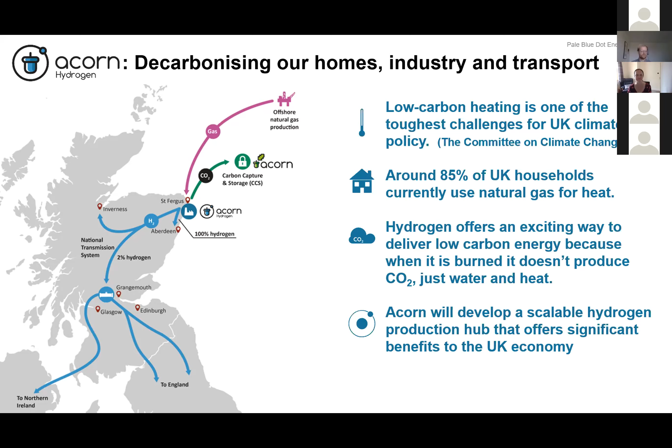So as I said, the first stage of the project will be a 200 megawatt reformer located at St Fergus, and this will be operational from the start of 2026, with two main routes to market: blending into the NTS at a 2% blend and supply to Aberdeen Vision. This will reduce UK emissions by about 400,000 tonnes of CO2 every year.

That will all be captured and stored through Acorn CCS. There's also a lot of opportunities to expand, and we're really excited about increasing the level of reformers and hydrogen production at St Fergus, which could supply increased levels of NTS blending, increased amounts to Aberdeen Vision, amongst a number of other uses we're considering.

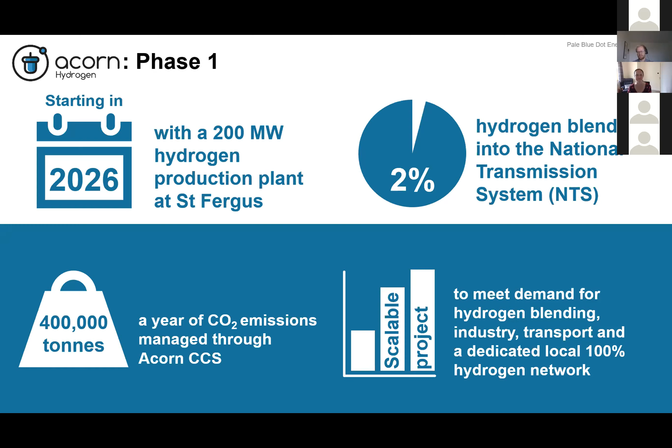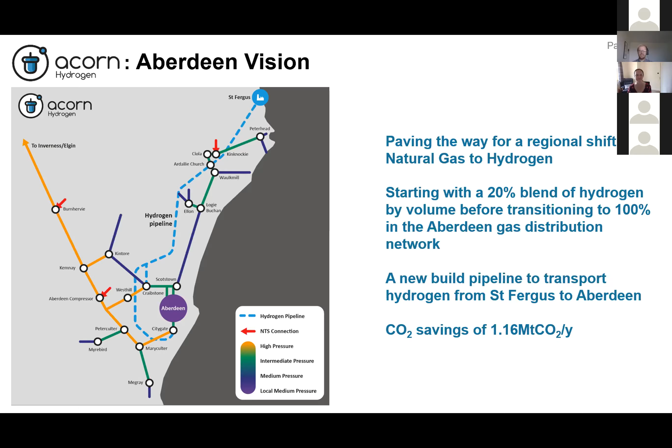And then that can be expanded, as Colin mentioned, using the same philosophy, potentially starting at a blend and moving through to 100%. So that was all I was going to say on the Acorn Hydrogen project.

We've also got a second project underway. This one I'll speak about is a green hydrogen project, and Joanne's already given a really great overview and introduction, which makes my job much easier.

So we are just coming to the end of the feasibility stage for the distilleries project, which is part of the broader North of Scotland Hydrogen Programme. The project partners in this phase have been Scottish Power, ourselves, Pale Blue Dot, our 3 distillery partners - Glenmorangie, Whyte & Mackay and Diageo - and also Port of Cromarty Firth. We've been very lucky and excited to have those 3 distillery partners on board. It's made communicating with the end customer really easy, and it's been great to see their enthusiasm.

So I'm afraid you've already seen this graphic, but hopefully I can talk a little more around it and provide that bit more context. So the phase of work we've completed was looking to install an electrolyzer that would be around 25 to 40 megawatts in size, and that would be operational within 2024.

We've currently identified 3 sites in the Cromarty Firth region that the electrolyzer could be located at, and all of them have really great potential for build out and expansion, and that's a key part of this project - to start in 2024 supplying the initial market, but then to look at all the amazing potential demands that might appear in the area and have the ability to expand the electrolyzer production to cater for those markets.